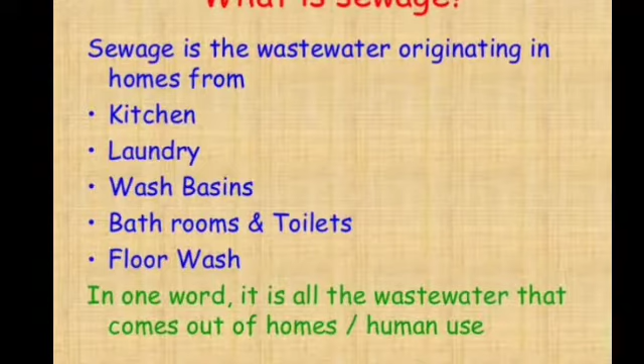The organic impurities present in sewage are human feces, animal waste like animal dung, urea, urine, oil, fruits and vegetable based pesticides and herbicides.

The inorganic impurities present in sewage are nitrates, phosphates and metals. The nutrients present in sewage are nitrogen and phosphorus. The bacteria present in sewage include those which cause waterborne diseases such as cholera and typhoid, and the other microbes present are protozoa which cause a waterborne disease called dysentery.

Sewage is a complex liquid mixture containing water, dissolved and suspended solids, organic and inorganic impurities, nutrients, saprophytic and disease causing bacteria and other microbes.

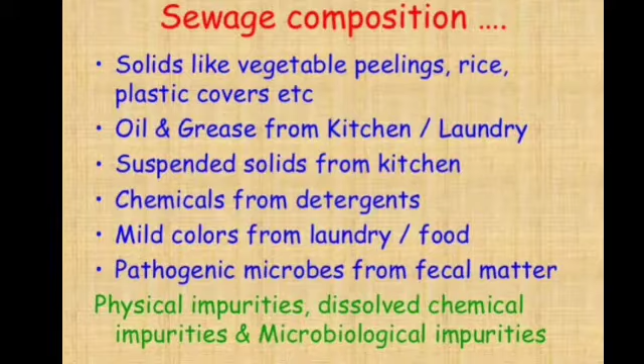In addition to the above components, sewage that reaches sewage treatment plants may also contain rubbish such as rags, wooden sticks, cans, plastic bags, polythene bags, napkins, sanitary towels, grit, small pieces of stone and sand, etc., which somehow get into a sewer.

In the sewerage system of a house, generally there are two sets of pipes. One set brings clean drinking water into the house, and the other set takes away wastewater produced in the house. So clean water supply pipes are narrow, whereas the wastewater carrying pipes are much wider. The pipes which carry away wastewater from houses and other buildings are buried under the ground.

So an underground pipe which carries away dirty drainage water and waste matter such as from toilets is called a sewer. Sewerage is an underground network of interconnected pipes called sewers that transports or carries the sewage from the place where it is produced, homes and other buildings, to the sewage treatment plant or wastewater treatment plant where it is processed.

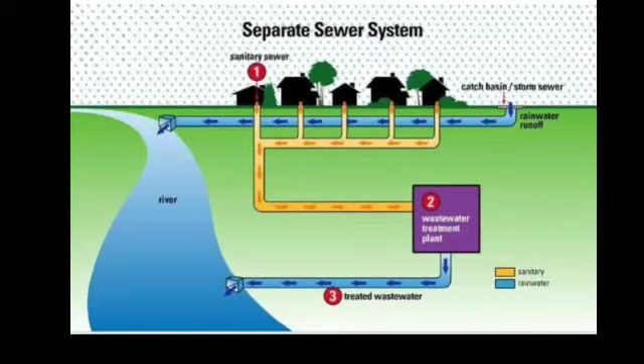Sewage is harmful to people and the environment. The sewage released by houses and other buildings contains a large number of harmful substances like disease causing microorganisms. This untreated sewage is discharged into rivers, lakes or ground.

It will contaminate our freshwater sources like rivers, lakes and groundwater. Drinking water contaminated with sewage will spread disease in people which can even lead to death. The discharge of untreated sewage into rivers and sea can also kill fish and other aquatic animals.

The processing of sewage to remove pollutants and make it harmless, so that it may be disposed of safely in the rivers etc., is called sewage treatment.

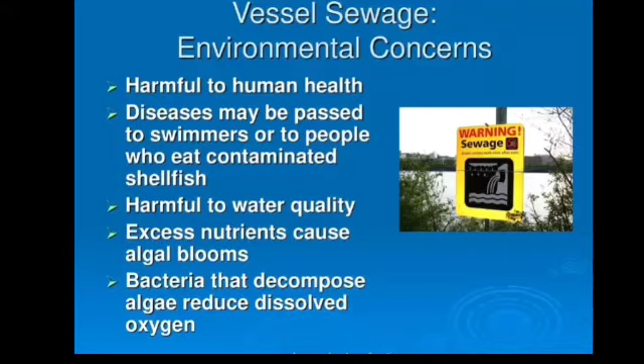Vessel sewage environmental concerns are also harmful to human health. Disease may be passed to swimmers or people who eat contaminated shellfish. It is harmful to water quality: excess nutrients cause algal blooms, and bacteria decomposing algae reduce dissolved oxygen. So we can say that sewage is harmful to people and the environment.

Sewage water treatment plant: a place where wastewater or sewage from houses and other buildings is brought for processing is called a wastewater treatment plant, written in short form as WWTP. The wastewater treatment plant is also called a sewage treatment plant.

Yes, that is a wastewater treatment plant or sewage treatment plant. This is the flow chart of the sewage treatment process with complete explanations. In this process, screening, grit and sand removal, first sedimentation tank, aeration tank, second sedimentation tank, and other important features are there.

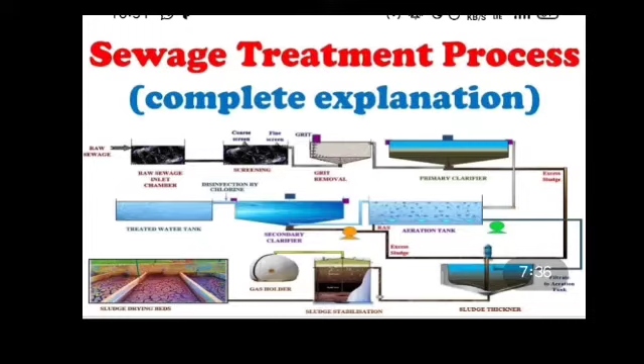First one is screening. The wastewater entering the sewage treatment plant is first passed through the bar screen. This process is called screening. The bar screen removes large rubbish objects like rocks, sticks, cans, etc. Screening is a unit operation that separates large floating materials of different sizes found in or on water, preventing them from entering water treatment or wastewater treatment facilities.

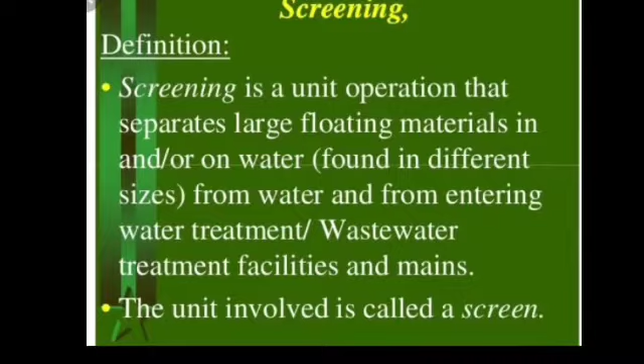The unit involved is called a screen. Second one is the grit and sand removal tank. The wastewater passing through the bar screen is made to flow slowly through a tank called the grit and sand removal tank. As the wastewater flows slowly, the grit and sand are removed from the tank from time to time.

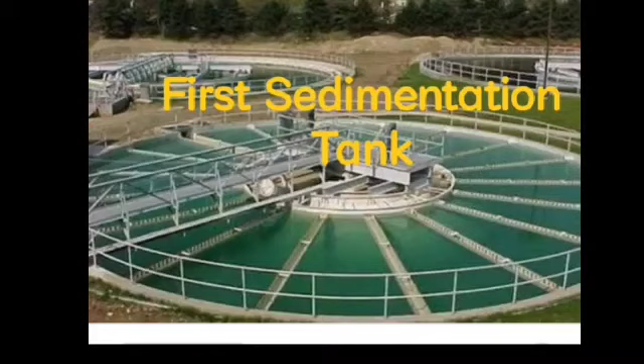This one is the first sedimentation tank. The wastewater is then passed into a sedimentation tank and allowed to stand there for a while. Most of the solid organic matter, faeces etc. settle down on the sloping bottom of the sedimentation tank in the form of sludge. Thus, the solid part of sewage is called sludge.

In this way, the first sedimentation tank separates the solid organic sludge from the rest of the wastewater. The wastewater treatment or sewage treatment gives us two useful products: biogas and sludge.

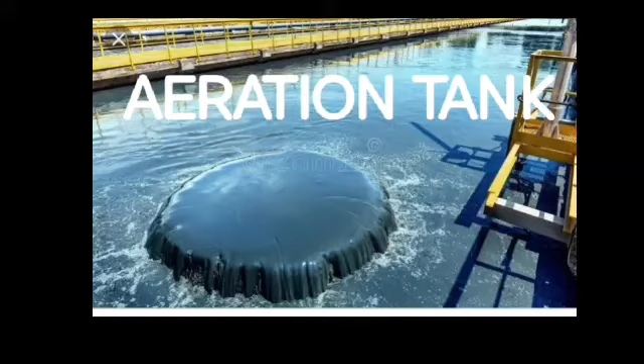This one is the aeration tank. The mainly watery waste or clarified water from the first sedimentation tank is passed into the aeration tank. The tank in which air is put into water is called aeration. The watery waste already contains aerobic bacteria in it, so compressed air is bubbled through the watery waste in the aeration tank to provide oxygen, activate the aerobic bacteria and make them grow rapidly in the water.

Second sedimentation tank: from the aeration tank, the treated watery waste goes into the second sedimentation tank and is allowed to stand there. In this tank, the microorganisms used in the aeration tank settle down at the bottom, forming a fine sludge called activated sludge. It is called activated sludge because active microorganisms such as aerobic bacteria and oxygen are present in it. The natural processes clean this water further.

Please note that water is cleaned naturally by processes similar to those adopted in a wastewater treatment plant. So sometimes it may be a necessity to disinfect the treated water with chemicals like chlorine or ozone.

This is because eucalyptus trees absorb all the surplus wastewater from the sewage pond rapidly and release pure water vapor into the atmosphere.

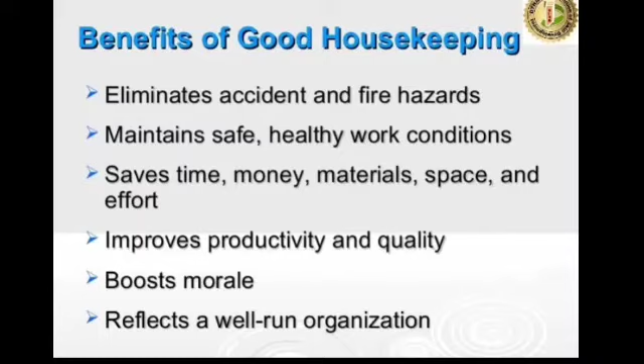Sanitation and disease: poor sanitation and contaminated drinking water is the cause of a large number of diseases in our country. This happens as follows: untreated human excreta is a health hazard, causing soil pollution and water pollution. Some of the waterborne diseases spread this way are cholera, typhoid, polio, hepatitis and dysentery.

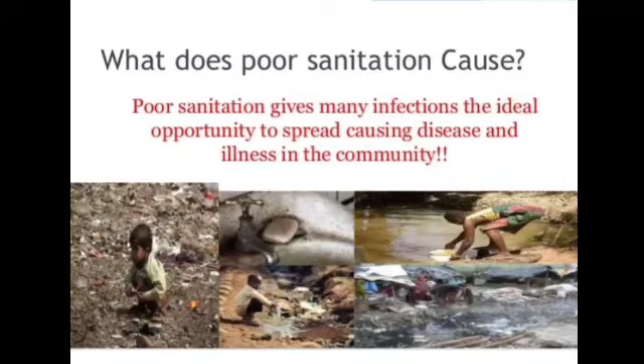Clean water is a basic need of human beings. Unfortunately, clean water that is fit for drinking is not available to all people. It has been estimated that more than 1 billion people in the world do not get safe drinking water. During the International Decade for Action on Water for Life, all effort will be made to reduce by half the number of people who do not have access to safe drinking water.

The United Nations General Assembly, on World Water Day on 22nd March 2005, declared the period 2005 to 2015 as the International Decade for Action on Water for Life.

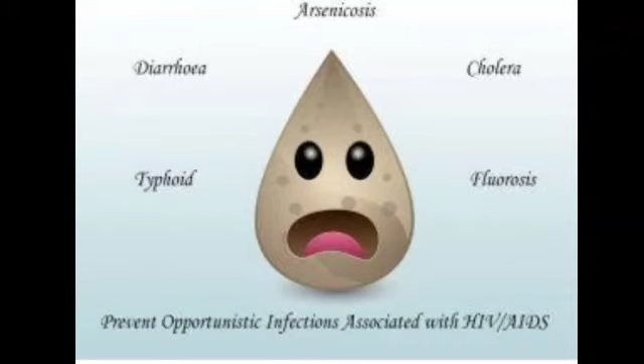As an alternative arrangement for sewage disposal, in order to improve sanitation and prevent waterborne disease, low cost on-site sewage disposal systems are being encouraged for people who do not have sewage facilities. Examples of on-site sewage disposal systems for human waste are septic tanks, composting tanks, and chemical toilets.

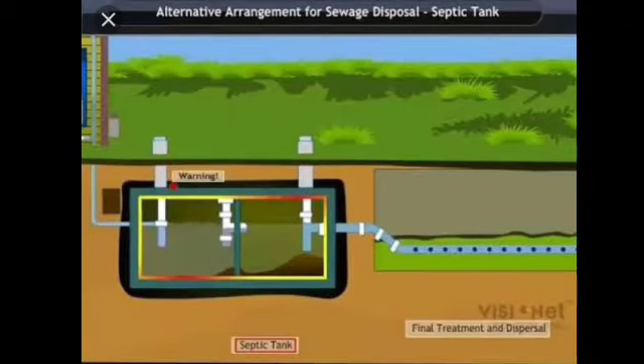This is the septic tank, or septic tank toilet. Septic tanks are suitable for places where there is no sewage system. The human waste or human excreta can also be used in a biogas plant for making biogas.

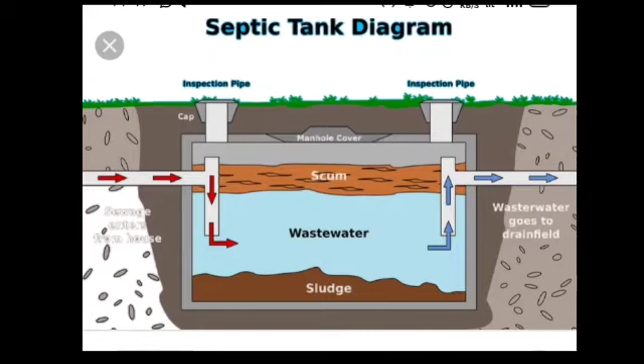Next is composting pits or composting toilets. Composting toilets are used where water supply is limited or not available at all. The advantage of these toilets is that they supply us compost, and hence help in conserving useful plant nutrients. A composting tank or toilet treats the sewage close to the place where it is generated.

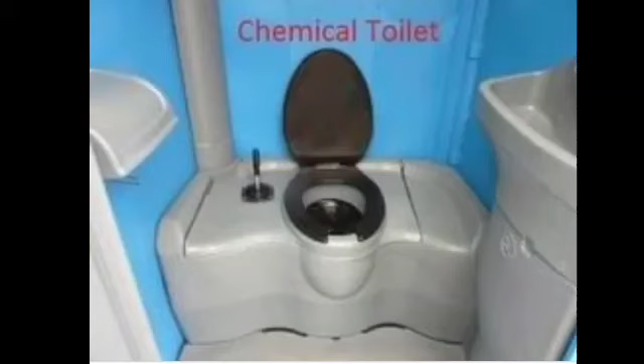Chemical toilets. A chemical toilet uses a chemically treated reservoir located directly below the toilet seat. All portable toilets are chemical toilets, and they can be shifted from one place to another. Chemical toilets are used at construction sites and at large outdoor gatherings such as music festivals and marriages, etc.

Vermi processing toilet. In the vermi processing toilet, human excreta is treated by earthworms in a pit. The earthworms gradually eat up all the organic matter present in the human excreta, decompose it, and pass it out from their body in the form of worm casting, also called vermi cakes. The vermi cakes are a kind of high quality manure which can be added to soil for growing plants.

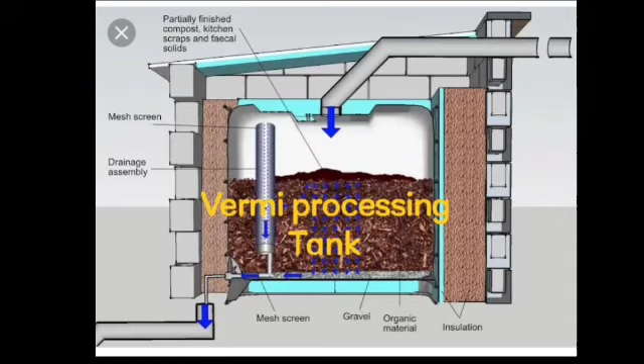Toilets in aeroplanes. How do plane toilets work? Aeroplanes have a special type of toilet called a vacuum toilet. The human excreta or sewage in an aeroplane is disposed of through vacuum toilets. When we flush the toilet in an aeroplane, a valve opens in a pipeline which has a vacuum inside it. The vacuum in the pipeline sucks the human excreta from the toilet seat with great force and carries it into a tank on board the aeroplane.

From the above discussion, we conclude that it is possible to have safe disposal of human excreta through low-cost on-site sewage disposal systems such as septic tanks, composting tanks, vermi processing toilets, etc.

Sanitation at public places. Poor sanitation in crowded public places can result in the spread of disease. All waste material produced in public places must be disposed of properly. If waste produced at public places is not disposed of regularly and properly, even an epidemic could break out. It is the responsibility of the municipality of the area to maintain sanitation and hygienic conditions at public places, but we can also contribute to this effort.